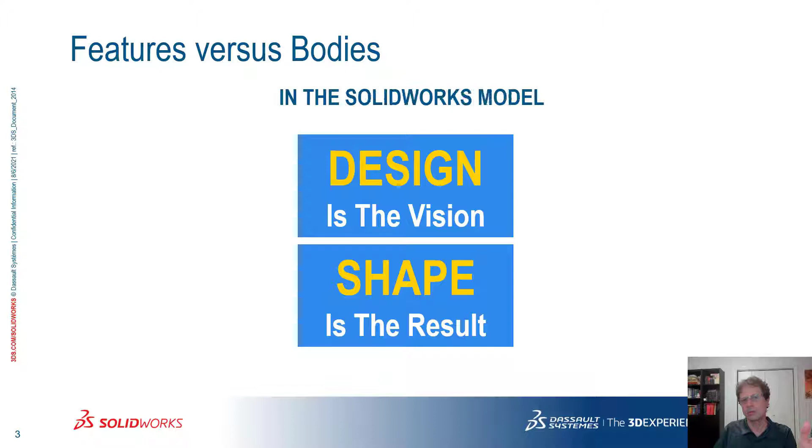So, features versus bodies. At one of the past SolidWorks Worlds, I attended a presentation by Monica Menghini from SolidWorks, and she said that in the age of experience, design is the vision and shape is the result. The following day, I was supposed to present something about multibodies, and I was thinking: what she said can be changed into - in a SolidWorks model, the feature is the vision, and the body is the result. So the feature is the information that you put in the model, and SolidWorks follows your instructions, your features, in order to create the bodies.

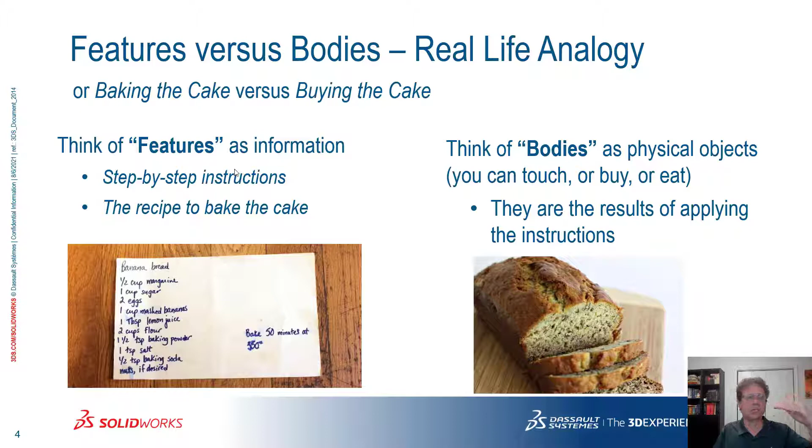Another way to look at this is thinking about baking a cake versus buying a cake. Features are pure information, right? They are the recipes - this is what you need to do in order to bake the cake. I'm not a baker, so I don't have recipes, I don't follow recipes. What I do is go to a shop, a bakery, and simply buy the cake. That's the body - I don't really care how it was created, I know it's yummy, and that's all that matters. So in the feature manager, features are just instructions, bodies are the geometry, the result.

Now, how can we use this in order to save time? Let's take a look at case study number 1. What I have here is a Lego piece, and my son wanted this other Lego piece.

If we are to 3D print this, I don't have a model for it, but I had a model for this one. So I asked him, what would you suggest me doing? How should I go from here to there? I don't have any features, any instructions, it's an imported body. He said, why don't we cut this, split it, and move it further out, and then just fill the gap inside.

Now it's time to divide and conquer. As you can see, I have only one solid body in this part. So I need to split this body in two and then move one of them into position. To split a body, I need a splitting tool, like a saw or a wire cutter. That can be done with a sketch, a surface, or a plane. Let's use a plane in this case.

The other thing you're going to see me doing is working as much as possible in the graphics area. I don't want to go to the feature manager. I don't want to go to the command manager.

I'm going to pre-select this face. I want a plane that's tangent to this face and also this face. I want the same plane to be perpendicular to this face. Notice I promoted the plane command to the context toolbar, so whenever I select faces, SolidWorks knows I might want to create a plane and gives me this option. The guess is almost right — I just need to flip the offset for the tangency. And with that, we got our plane.

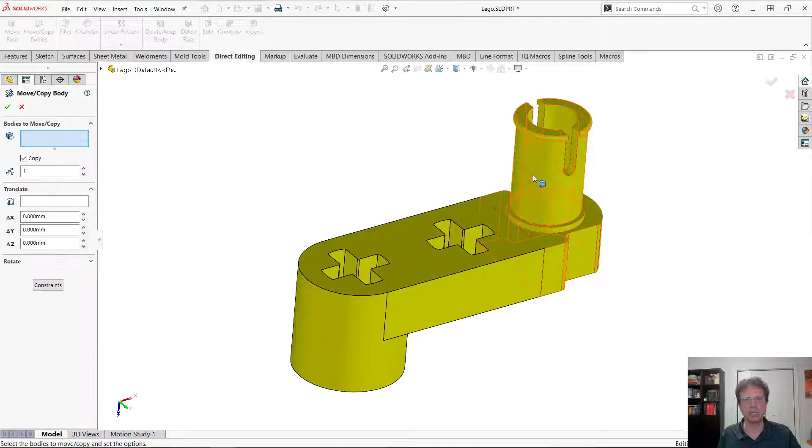Move body command. Move body has two flavors: translate and rotate, where you select the body and move it in the direction you want, or rotate it about a certain axis by a number of degrees, or constraints, which are very similar to mates in assemblies. So let's instruct this body where to be.

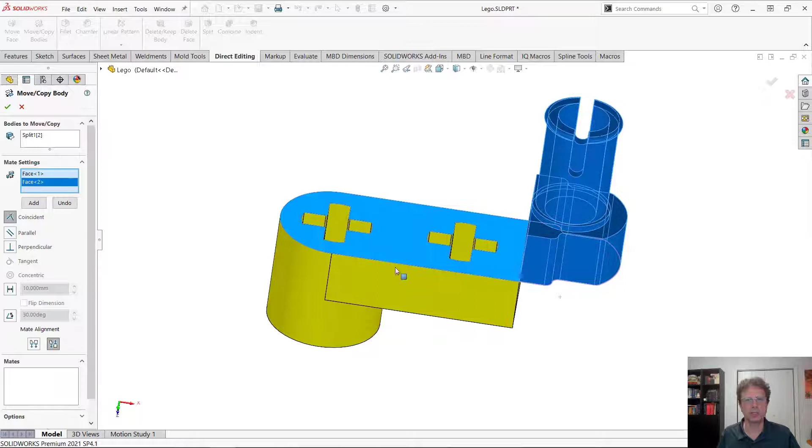I want this face to be coincident to this face, but I want them flush, so let's change the mate alignment and add this instruction. Notice I'm calling them instructions, not mates. Let's select this face and this one and apply a distance of 5 millimeters, then make these two faces flush, add this instruction, and finish the command.

So you can see right now where I am — we started in this position and now we are here. Just be aware there is a little bug in SolidWorks related to applying this type of distance mate in the body move copy command. If I do a force regeneration, which is Control Q, notice how this fails.

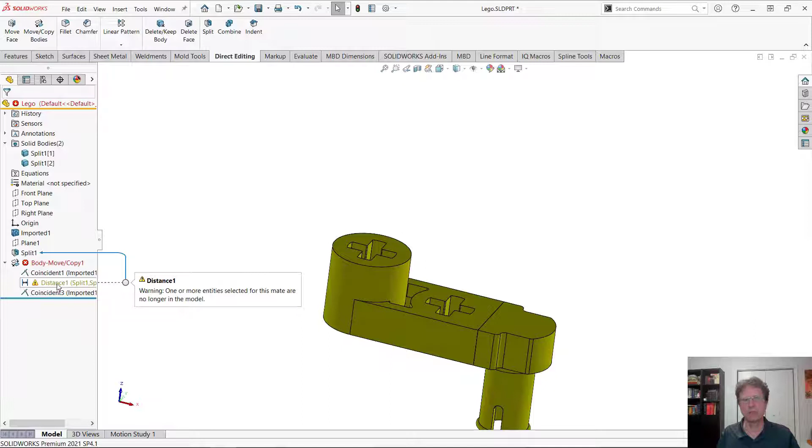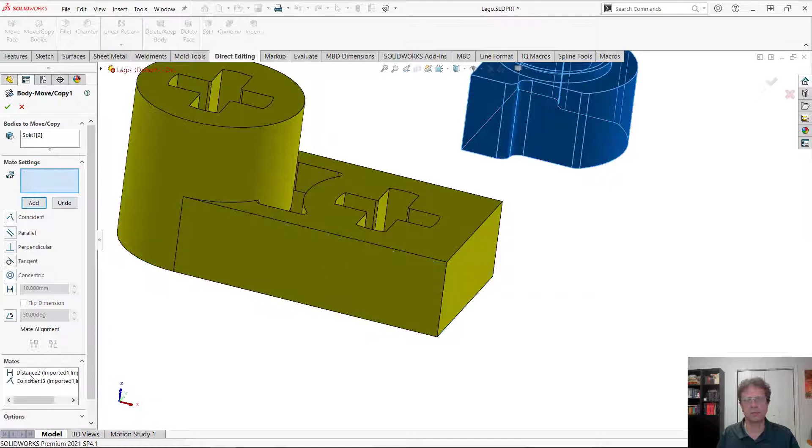Fortunately, there's a very simple fix — you simply need to edit that one more time. So what am I going to do to this distance? I'm simply going to delete it. Also, to make my selection easier, I'm going to change one of these coincidents to a distance. So for the time being, this is going to be a distance — that allows me to easier select these two faces. I'm going to go back to 5 millimeters and take the first distance and turn it to coincidence.

There you go, all the instructions were recreated. Let's do another force regen, Control Q. This doesn't fail anymore. This is a known problem.

I'm going to give you the SPR number if you would like to vote for fixing this sooner rather than later. Now let's copy this.

Remember, we need one more copy of this. Unfortunately, I cannot copy this body as long as I'm trying to apply constraints. So let's move to the other flavor of the move body command called translate or rotate. Now you can see I have an option here to make a copy of this body. If I just simply click OK, another body is going to be created on top of the other one.

But just to show you what happens, I'm going to move the copy out of the way so you can see the clone that got created by this.

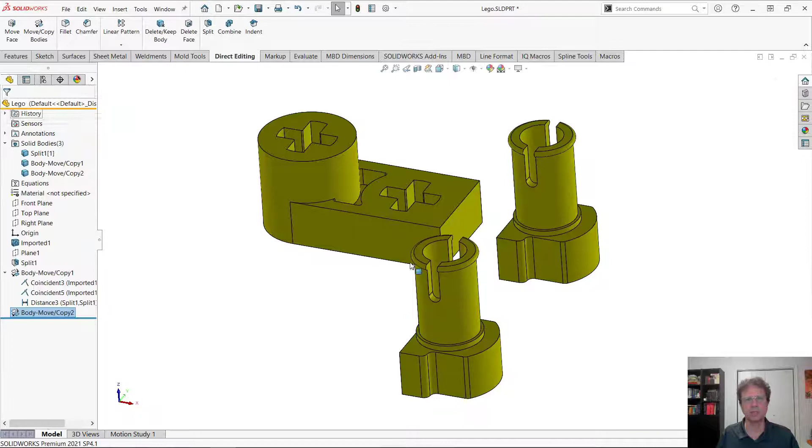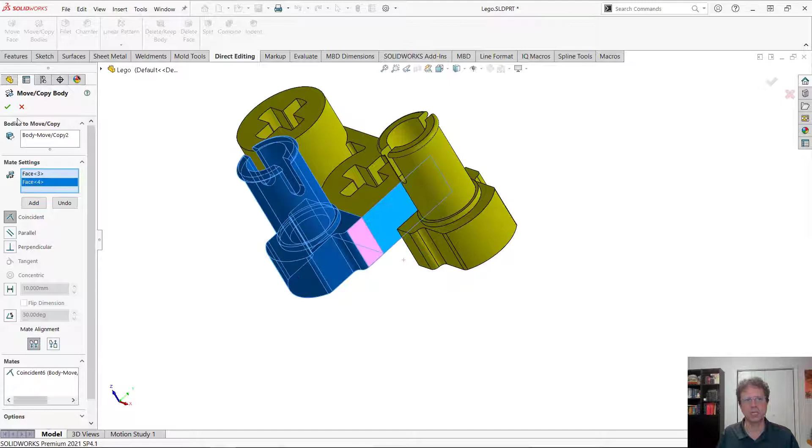And let's add one more command, one more move body feature. For that, I'm going to switch back to constraints. I'm going to get this body to have this face coincident to this face, and this face also flush with this face. So allow me to change the alignment and accept this new position.

Let's compare what we have on the screen with what my son wanted. It looks like we need to bridge this gap, right? He would like to have all this welded together. I have three bodies, as you can see here.

One thing I'm going to do, I'm going to create a sketch on this face. Notice that this face is already selected, so I can use the shortcut toolbar. I press the S key, convert entities. I'm getting my edges, press S again, and extrude. How far away should I go?

So let's take a look at some of the options. Probably a good one would be up to body or up to next. Let's go up to next.

Also very important is, do I want this new geometry to merge the existing geometry? Whatever gets touched gets merged into one body. You can see here the option to do that, merge result. Also, I can specify what exactly is going to be merged to the new body. So let's say everything is going to be merged to that new piece of geometry. And you can see I got the result I wanted.

Now, I don't know about your customers, but this particular customer is very demanding. He wanted now this piece. So the question is, how do I go from here to there? Well, there are a couple of things I can do.

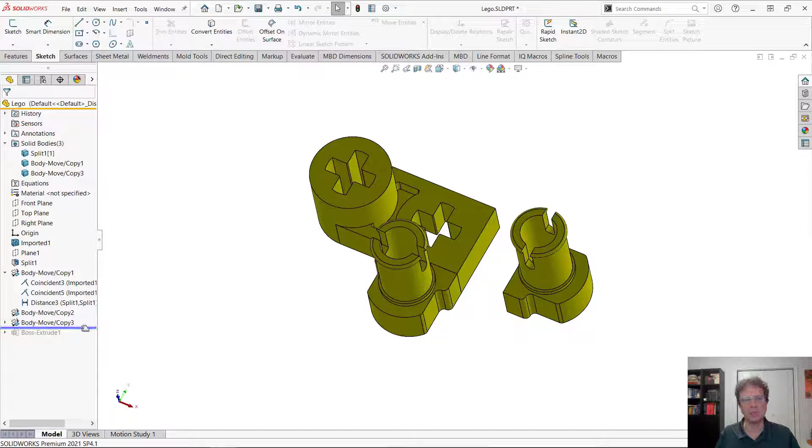I can go back in time before I bridge this gap and mirror this body to the other side. But one thing that would also be interesting to find out is, when I started with this, is this part symmetrical? I don't know if you ever tried, but we have a great tool here called Symmetry Check.

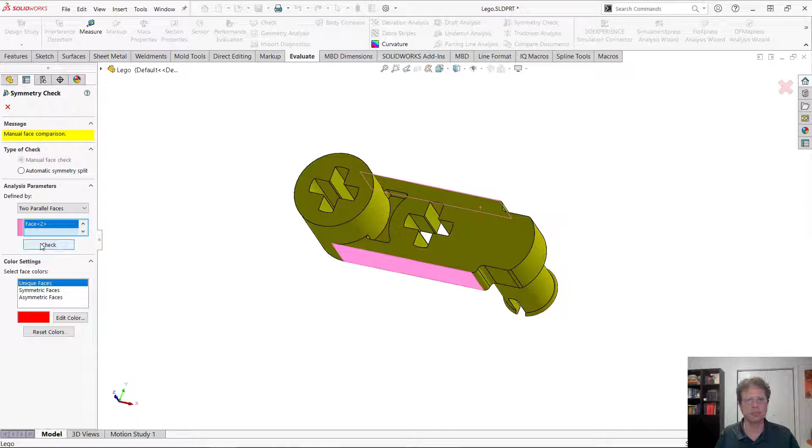So allow me to select this face and this face. It works to check if the entities on the part are symmetrical in regards to a plane that would be located in the middle of these two faces, kind of the symmetric position. And you can see I'm getting everything green, which means everything was symmetrical.

The other thing about the symmetry check is a plane actually gets created in this location. So now I know that if I come back to the present, I can simply take this plane and mirror the whole body, not the features, but the whole body about it, and then merge the new resulting solid with the old one. And you can see the job was done.

So just a couple of features and we are good to go. Let's take a look at the next case study.

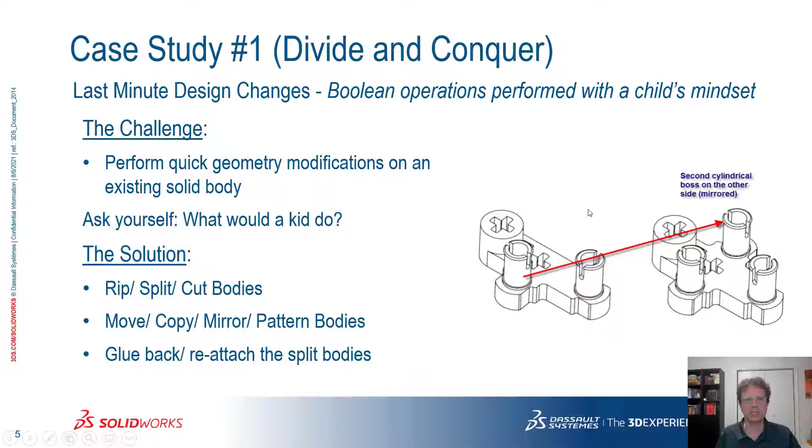Let's take a look at the second way of using multi-bodies to save the day. So I'm going to open up the next case study. I have here one body and I would like to apply a fillet. Let's see what fillets we can apply.

Let's start with the 1 millimeter fillet. Looks like it works fine. Let's try 2 millimeter. Works. 3, 4, 5. You can see how this geometry over here becomes harder and harder to compute by SolidWorks.

Let's go to 6 and no preview. So if I click OK right now, it cannot apply a 6 millimeter fillet. So what can we do? Always think about divide and conquer.

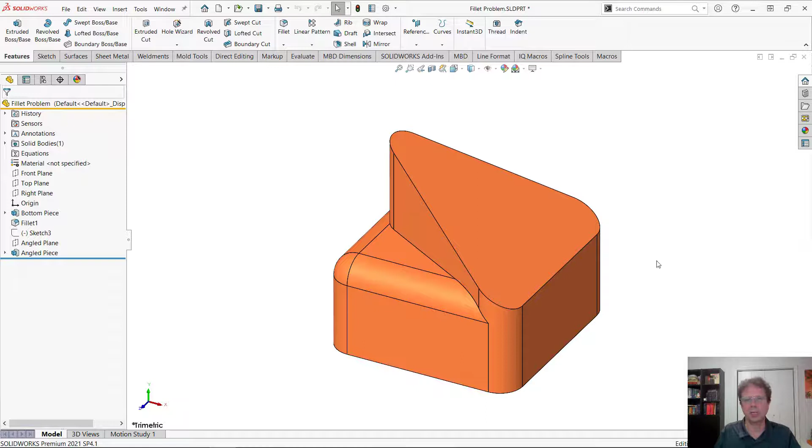Let's examine how this body was created. What instructions were used? Remember, features are pure instructions. Looks like we started with an extrusion.

We added a fillet on the top face. Then there was a line here that was used just as a reference for creating this plane. Now we have this plane, and the last feature is simply an extrusion up to that plane.

As you can see, the sketch is on the bottom, up to the plane. But remember from the previous example, we have an option to say create your own body, don't merge to the other one. So now I have two bodies, body 1 and body 2. I can hide one at a time.

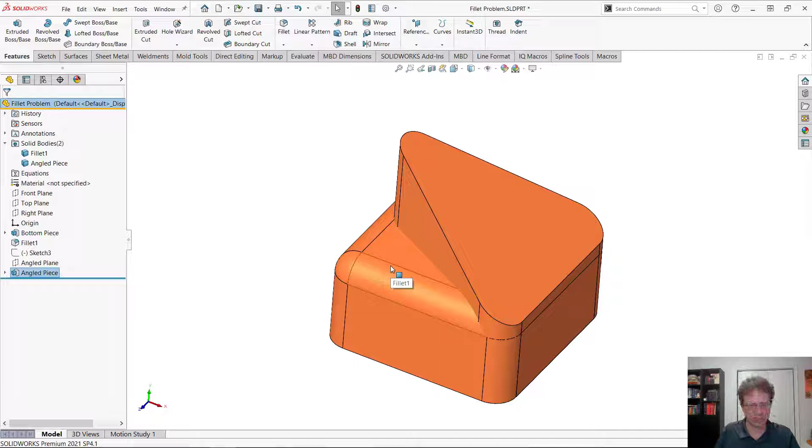A quick tip: if I want to hide one of the bodies, I simply move my mouse over it and press the Tab key. To bring it back, Shift-Tab. So notice Tab, this is clear, it's a body on its own.

I can very easily add a fillet, 6mm fillet, and it worked. Now let's bring the other one back with Shift-Tab, so now both of them are visible, but I would have to combine them together.

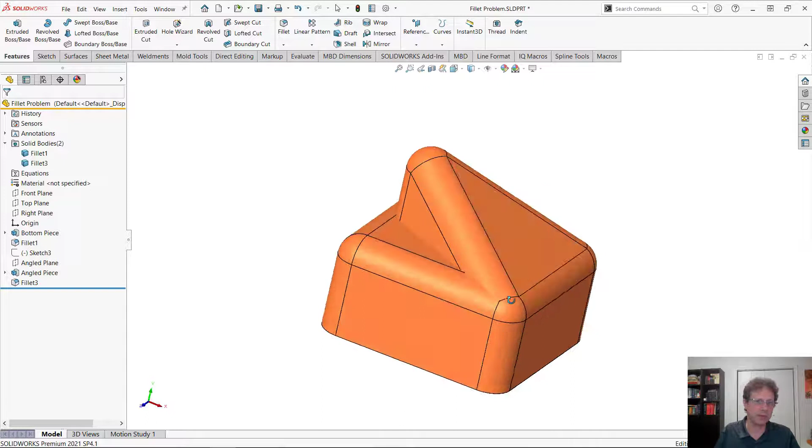Under direct editing, you have the Combine command. Use the option to Add, select the two bodies, add them, and now I have one body instead of two. And just to prove how amazing this is, I'm going to add a fillet here, same radius, and it worked fine.

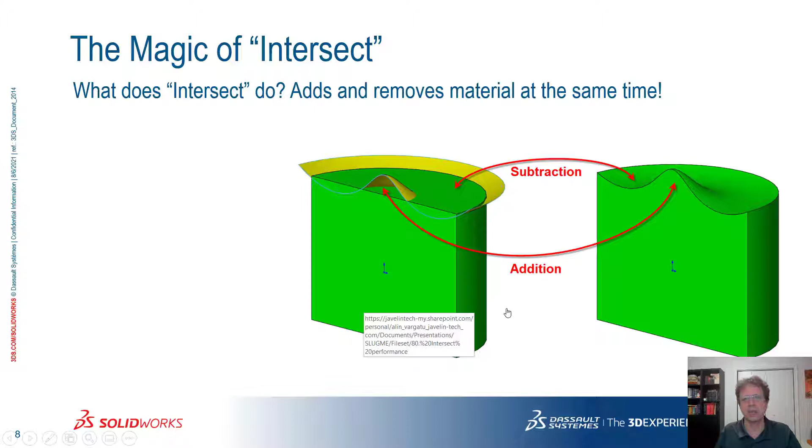Let's see how this works. Currently I have here a solid body, this cylinder, and I have this surface body. Looks like a sombrero hat, right? Notice they're independent of each other.

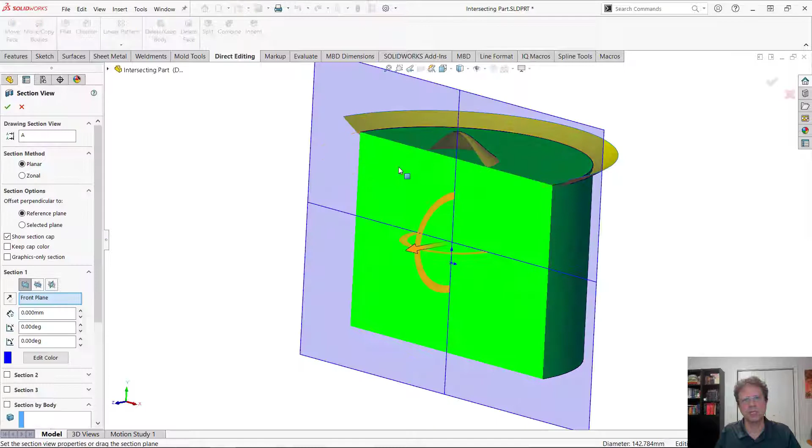What I would like to do is fill the space between this part of the sombrero hat and the cylinder, and also remove the space that is above the sombrero hat. So any geometry I want to be removed from there—the tool for that is going to be Intersect.

I'm going to select both entities. Intersect accepts surfaces, solid bodies, and planes. And it's looking for regions that are created by, and completely enclosed inside, the faces, planes, and surfaces that you selected.

You can see there are three regions: region 1, region 2, and region 3. If you want to remove one of them, or more than one, you can simply select it, and you can see it gets a check mark here. Also at the bottom of the property manager, I have the option to merge the result.

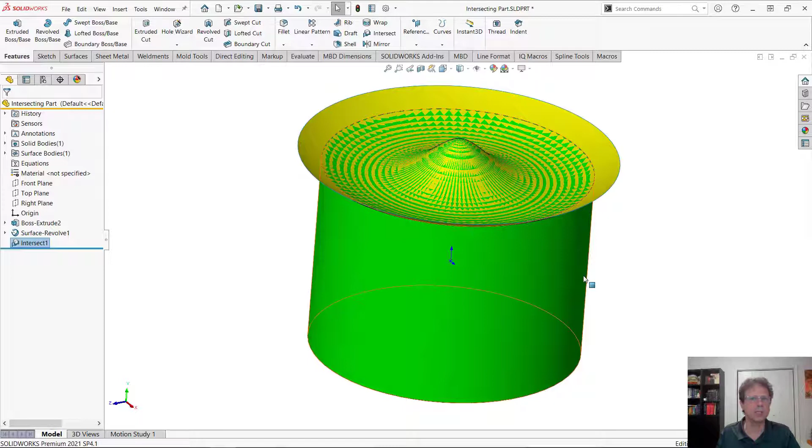So with one option, I can get the job done. I can do even more with one feature—I can remove the reference surface by using the option Consume Surfaces. You can see the end result is just a body.

Now, this is a simplistic way to use this tool. Let's see if we can find really good use cases for it.

Probably one of the best is simply making some money. For a bet, you can bet your colleagues who might not have attended this presentation, saying: can you create a solid body without a sketch in SolidWorks, starting from scratch? And if they say no, I'll bet you $1, or whatever currency you want to use, that it is possible.

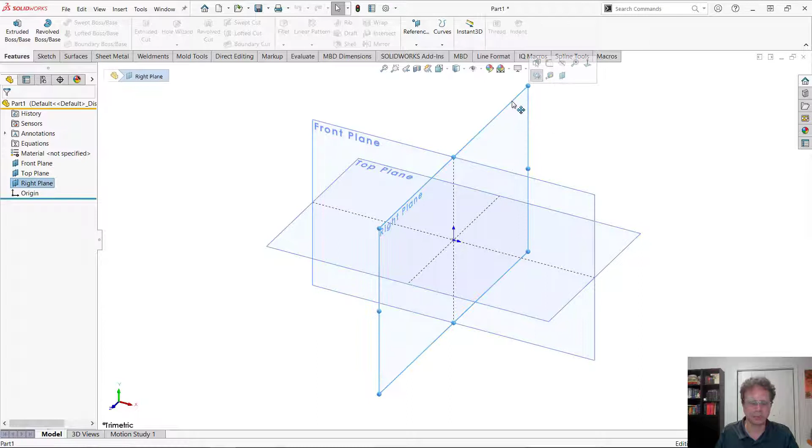So let's see how this works. Let's start with the simple part—I'm just going to make the major planes visible, and let me copy a couple of them. I'm going to use the offset command for the planes. One quick way to do that: you select a plane, hold Control, drag it, and you simply create another plane. Let's try to do the same thing for this guy—Control, drag it.

And the last one, Control, let's drag it down. So what I have right now is a space that's most likely completely enclosed by this plane. What's a quick way to select all the planes?

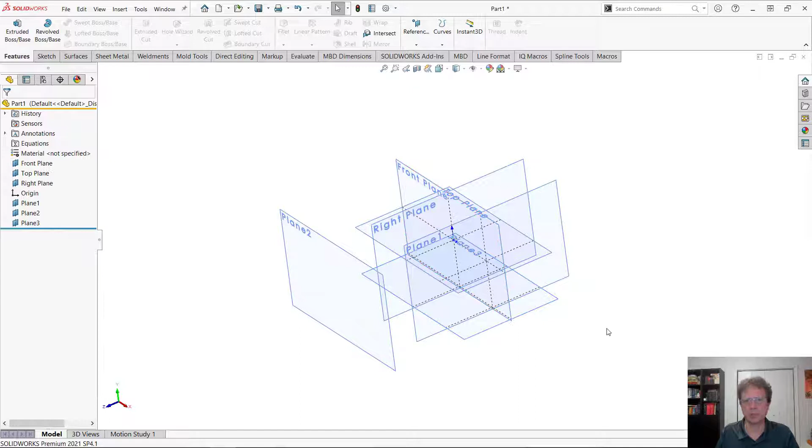You might wonder. It's the same thing that would happen if you hunt with a dog. I give the dog the scent and it's going to find the prey. In this case, I select the plane, press Ctrl A, and it selects all the other planes.

Okay, so let's run the intersect command with these planes, and you can see a solid body got created at the intersection of those planes. Now, this is a little bit of a gimmick. Let's go to much more serious stuff.

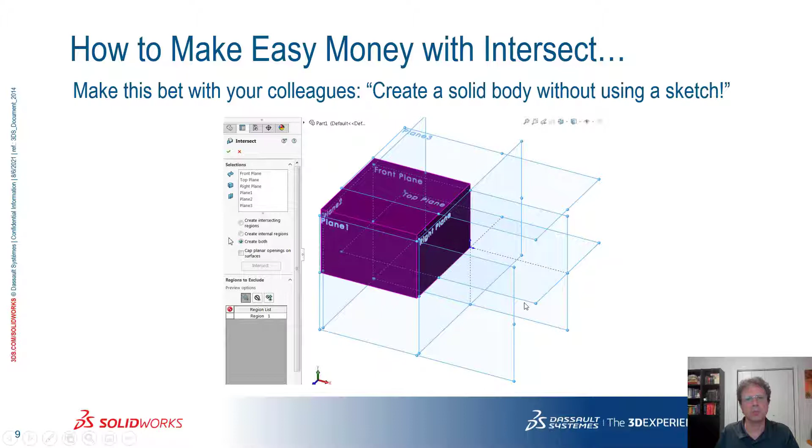A very common use case is you have something that should have a cavity, even though it has some openings to the outside, and you're wondering what's the volume of that cavity. You need to fill it, right? So let's give it a try.

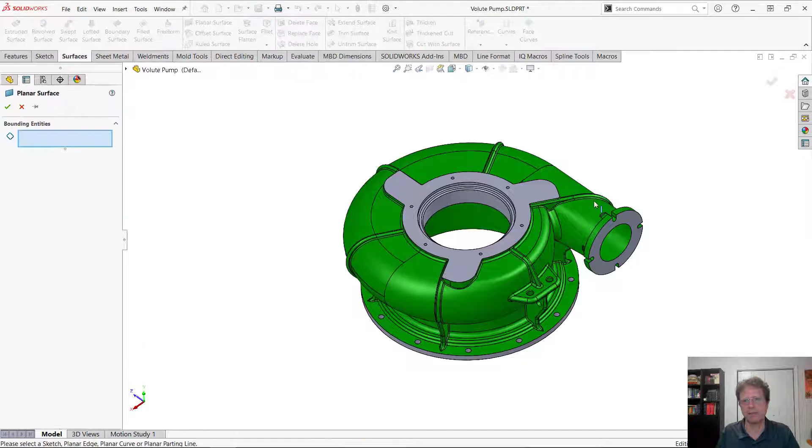I have here a volute pump, and the first thing I need in order to use intersect is to seal this gap. So we're going to create some lids. One great tool for that is the planar surface. If you have planar edges, you can actually select them.

Allow me to use the magnifying glass here. I'm going to press the G key to select this edge, and also over here to make sure I'm selecting the right edge. Right? So there you go. One feature created 3 surface bodies. So again, we're talking about bodies.

Now what I want is to create the volume that's completely enclosed in there. So let's run the intersect command. This time I'm going to ask it to create internal regions. So I'm going to select everything and simply fill the volume inside, fill the cavity with something. Let's see what we get.

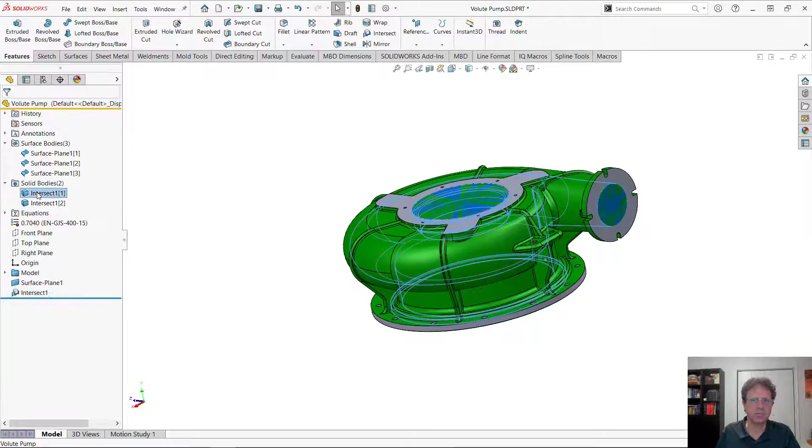You can see the volume got created. A new body gets created. So if I go into the solid bodies, I can see, okay, that's the one. Let's isolate it so we can see just this specific body.

And even more, let's give it a certain material. What would we like to do here? By the way, in SolidWorks 2021, you can even search for a material. I'm going to search for water, and apply it to this body. So now if I want to calculate what is the mass, what is the volume, no problem, it works fine.

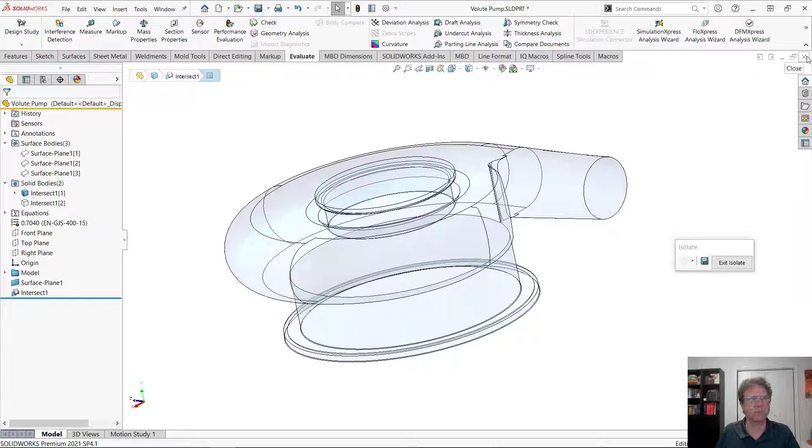Okay, so you can see the wonders of the intersect command. Next example,

intersect versus combine. So what I have here, I want to create a knife with no cutouts. I don't want to use a cut feature, extrude cut. I don't want to use extrude revolve cuts. I don't want to do anything. I simply want to take existing bodies and use them to modify other bodies.

When I finish with it, the part is going to look like this. It's a multi-body part. Right, so you can see here I have the blade. I have, for each, the handle is in two halves, and I have 3 pins. One thing that's important about the pins is to be shaped in such a way that they match the complex shape of the handle.

Now, in the past, I did that with combine commands, and you can see it's pretty complicated. Allow me to suppress all this, and let's do it again.

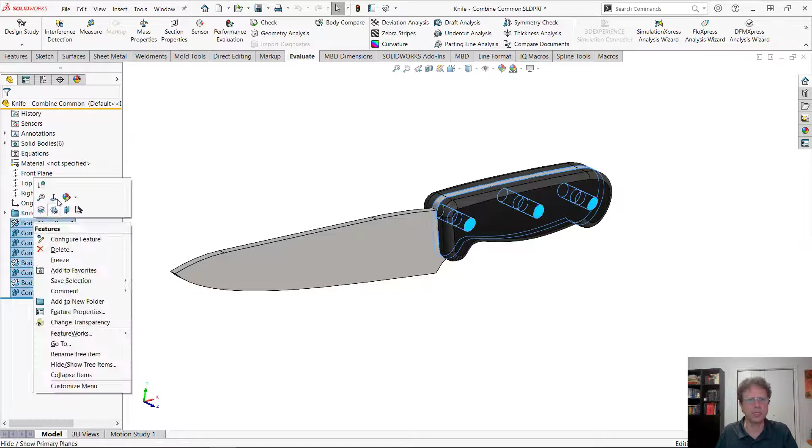Let me isolate them one at a time. So you can notice this is the blade, this is the handle, and it doesn't have holes. It's one body, and these are pure cylinders.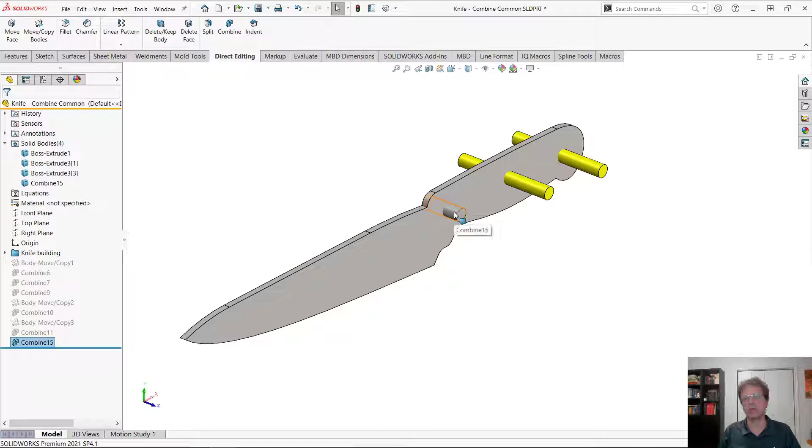Let's start with shaping the pins. So you might think maybe you can run combine using the common option. Select the handle, select one of the pins, and you can see how SolidWorks maintains only the volume that was common. This way you get the end faces to be the shape that you want.

The problem with this is that both bodies get consumed by the combine common operation, so that would not be acceptable yet. What we need to do is to clone the handle 3 times.

So let's go to the copy bodies command, increase the number of copies to 3, select the handle, and click OK. So right now I have 3 clones of the handle.

Let's run the combine command, this time with common, select also the pin, and let's click OK. See what happens. You can see how one of the copies of the handle gets consumed along with the old pin, and I'm getting the shape that I wanted.

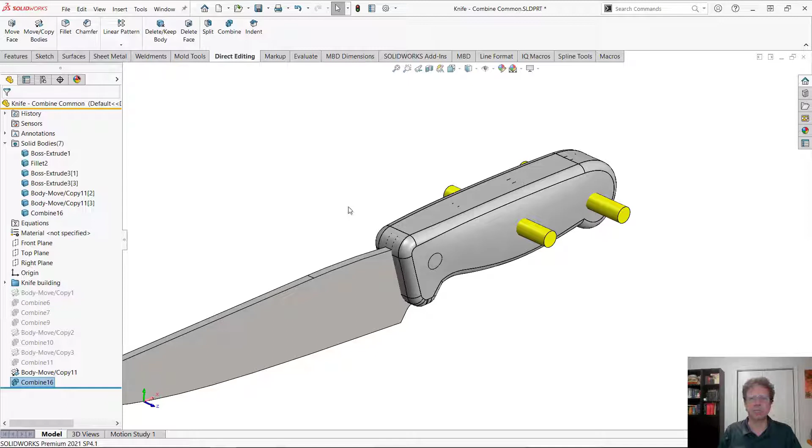Let's do it again. Common between this and this. Let's see if I press enter, what happens. You can see how the enter repeats the last command, so that's going to save me time, right? And the job is done.

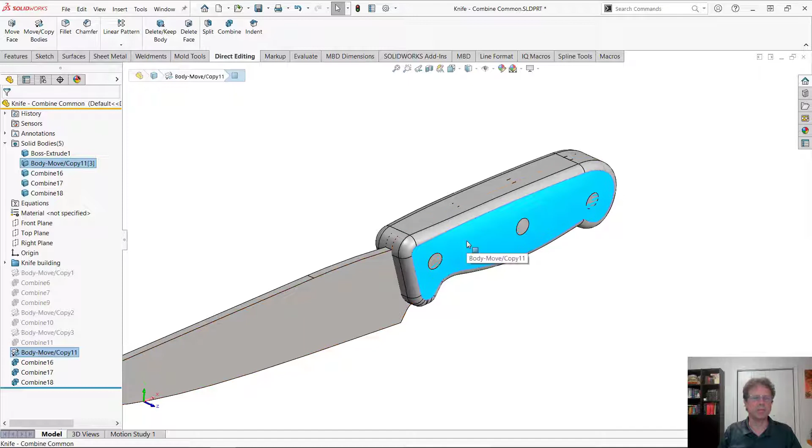We have the handle, and we have 3 pins. Now I would like to remove the 3 pins and the blade from the handle. So similar to what we did before, we need to make a copy, not of the handle, but of the 3 pins and of the blade.

So now I can run a combine subtract. I can subtract from the handle the copy of the blades and of the pins. And you can see how this is going to split this into parts, and SolidWorks even asked me which one I want to keep. I want to keep both. If I'm isolating these two handles, you can see that they are done. I don't need them anymore. We're good to go, let's hide them.

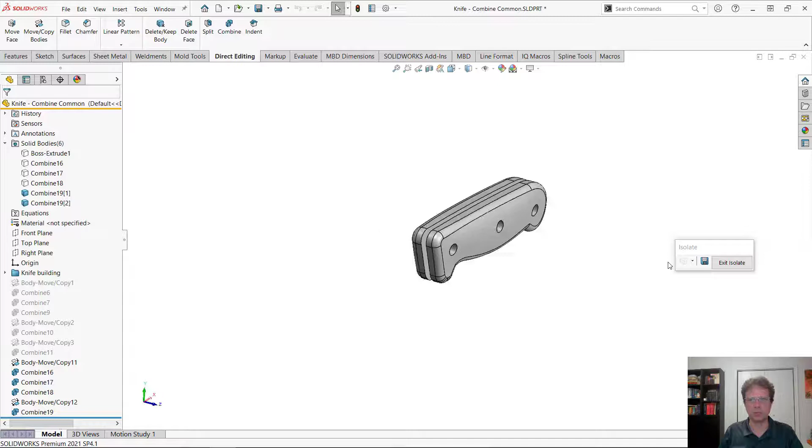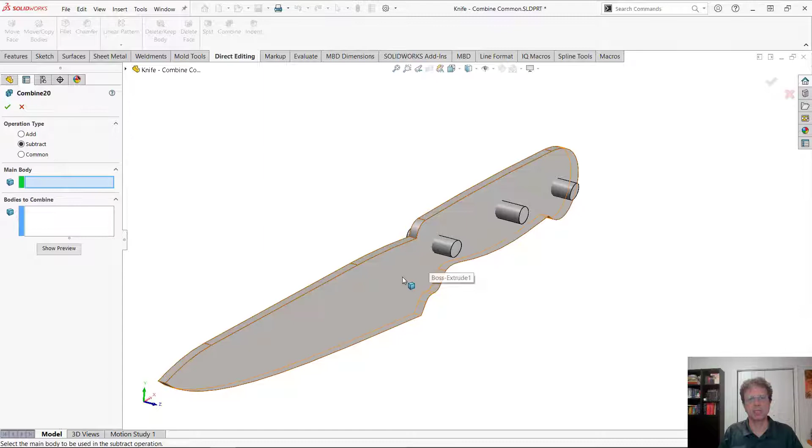Because we need to do one more thing. We need to subtract these pins from the blade. So again, I need a copy of them, so let's run the copy command. Make a copy of these three pins, and subtract these three copies from the blade. One, two, three.

Now we're good. Let's bring back the handle, Shift Tab, and you can see if I'm isolating the blade, it works fine. If I'm isolating the pins, they have the shape that you want. And with the handle, we already know. The problem with this, it was a very cumbersome process. I'm pretty sure many of you fell asleep just by watching me doing it.

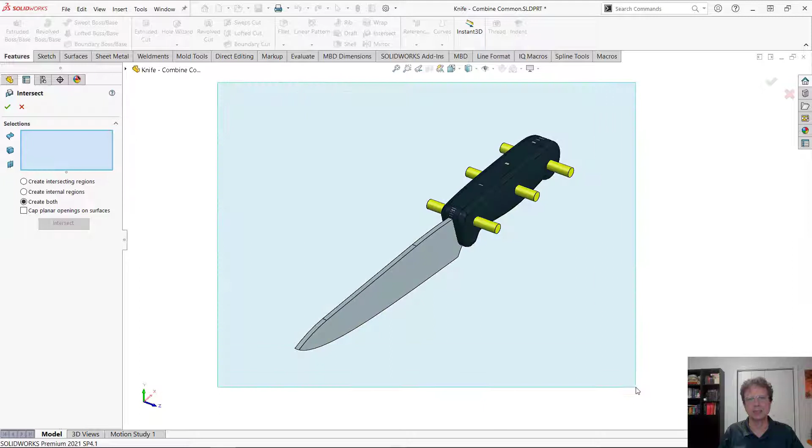So allow me to delete all these extra features, and let's see if Intersect can do the trick for us. So I'm going to run the Intersect tool, select everything, and ask SolidWorks to intersect them.

Now, what exactly do I want? I would like to remove these areas, these regions. And everything else I don't want to be merged, I want them kept as separate bodies.

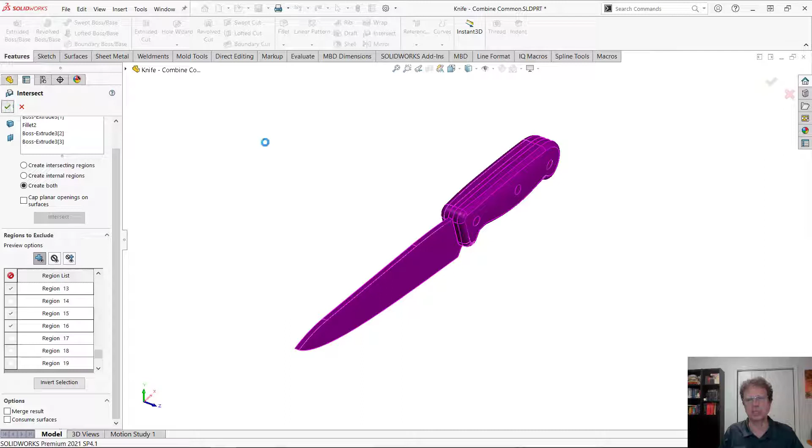Okay, now if I'm looking at the two handles, let's isolate them. They look fine, the job is done for the handle. Let me hide them, tab and tab.

The blade is actually made in two pieces, so we need to either run combine add, or if you want, you can even run intersect between these two. And you can see here at the bottom the option to merge the result, so this turns into one piece for the blade.

Let me hide the blade now, and you can see how each pin is made out of three pieces. So if you want to run combine, you need three combine features. Let's see what intersect can do with these nine bodies.

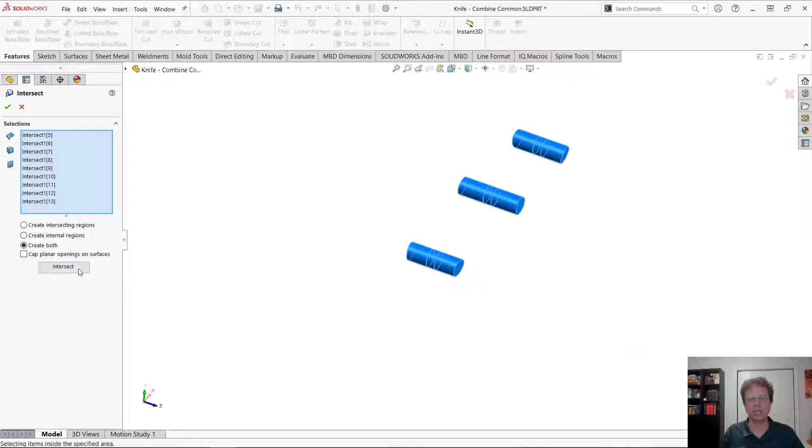So one thing it can do, it can recognize them as separate regions, but also it's giving you the option to merge everything that is possible to be merged. And you can see how in three features I was able to get the pins, the two handles, and the blade. So intersect saves us a lot of time.

Let's take a look at the next example. In this case, we will use multi-body techniques to reverse engineer the shape of a model. This came from a real life case study. I helped a client of mine who has a 3D printing shop. He received a model of a very complex camera from one of his customers. Unfortunately, I cannot share that with you, so I created my own model.

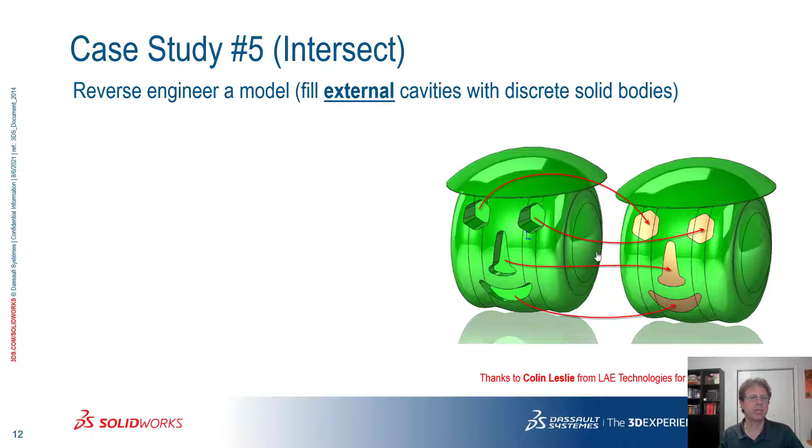He 3D printed that camera and it came up with a number of cavities. His customer told him he actually wanted these cavities to be filled in such a way that the outside is flush with everything around, just using a different material because that's where he's going to have the lenses. So the question is, how can we reverse engineer something like that?

Let's see, let's open the example. You can see it has these cavities. So the first thing I'm going to do is make a copy of this body like we did before. So let's make a copy of it, and let's hide the original. I'm going to go here, hide the original body. I have just now a copy.

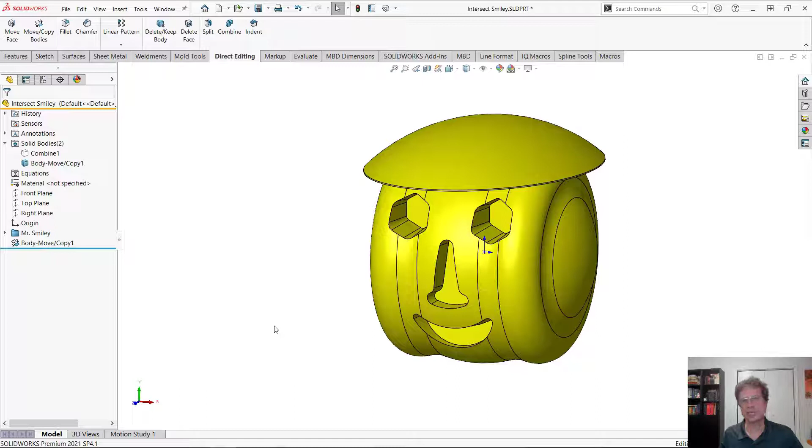What I want to do is get SolidWorks to remove all these cavities and revert to the original shape. And fortunately, that is possible using one of the direct editing tools called Delete Face. Delete Face has three flavors, the one I'm going to use is called Delete and Patch.

And you can save a lot of time selecting the faces you want to delete by simply selecting one and then using the context toolbar to select, in this case, all surrounded faces. You can see I can go click, and I'm selecting tens of faces with just a couple of clicks.

What Delete and Patch does is not just removing these faces, but also healing their neighbors, the surfaces around, back to their original shape. Let's see the result, and you can see it worked fine.

Let's bring back the original body, and you can see I have 2 bodies, one on top of each other. You probably can guess what I'm going to do next. I'm going to run the intersect command between these 2 bodies, and I'm going to ask SolidWorks to not merge the results, so now every region is going to create its own body.

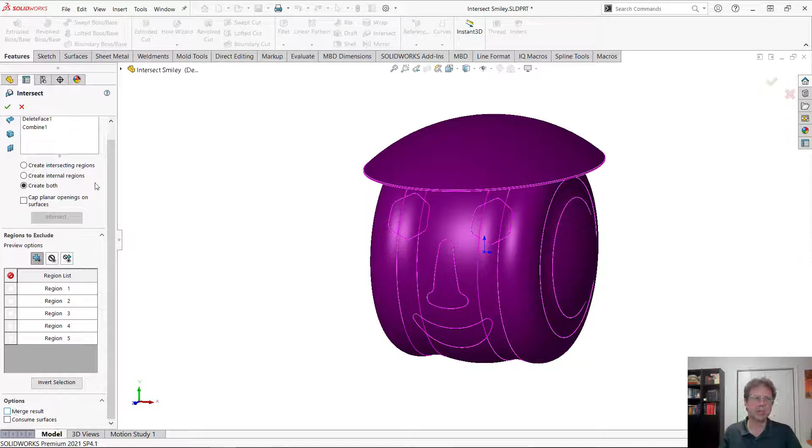You can see this is the original, allow me to isolate it. Now let's go and hide it, and you can see I'm getting the lenses. Just apply a different material and the job is done. So a nice way to save the day.

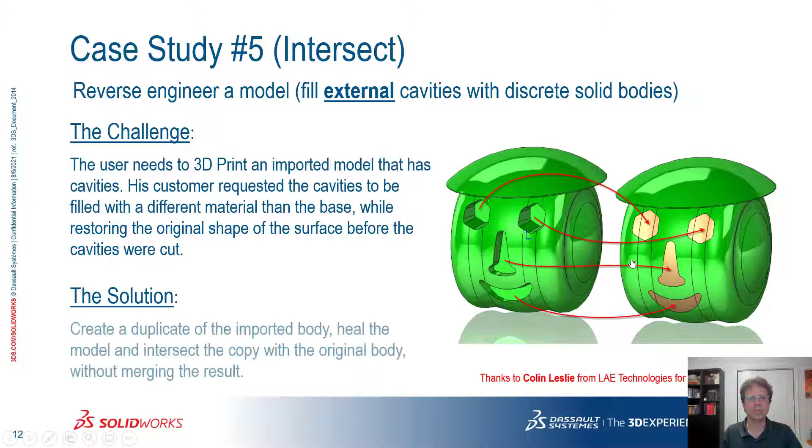With this Intersect, we already know it's very easy to fill a bottle. We just need the plane for that. So let me take the top plane and do an offset. Remember, control drag does that. Let's start with maybe 2 inches.

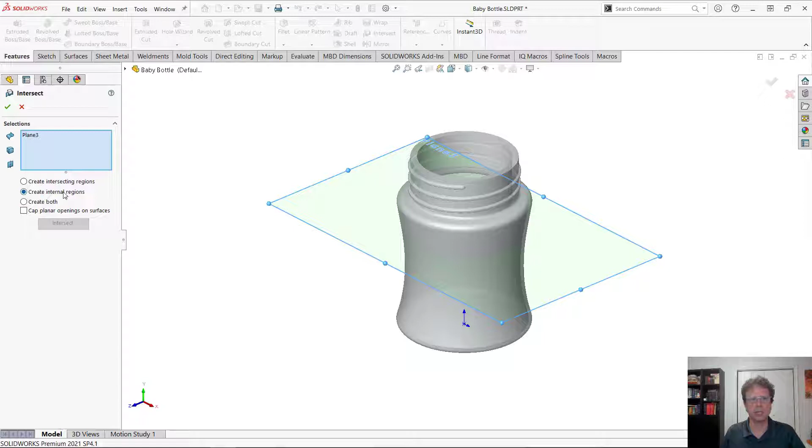And ask SolidWorks to fill this bottle up to this plane. So again, intersect, use the option to create internal regions. I don't want to split the bottle, I just want to fill the bottle. Intersect, and you can see that has been filled. Allow me to hide the bottle for a moment, and you can see right now I have the volume of milk. How do I measure it?

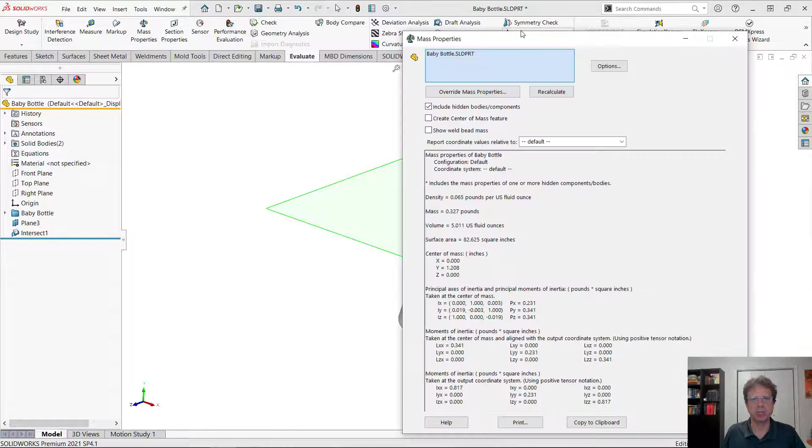So there are a couple of ways to do that. One is with the mass properties. Just make sure that instead of selecting the whole part, you select the actual body that you want to measure. You can see right now the volume is about 3.8 ounces, and I want exactly 3 ounces. Of course, I can double click on the plane, pick up this dimension, adjust it, measure again, and keep repeating all that work. That's very, very time consuming.

Even better, I can get the volume reported as a sensor. So I can go to the sensor, and let's add one related to the volume of this body. You can see right now, if you go here, the volume is 3.818. So now it's just a matter of varying this dimension and rebuilding to read the volume.

Fortunately, there is an even faster way to do that. I can simply add a design study. If you have SolidWorks Simulation Professional, you can even use the optimization option to find the actual result. If not, you don't use the optimization. So let's try with optimization first. I'm going to add this dimension as a parameter, let's call it level, the level of liquid.

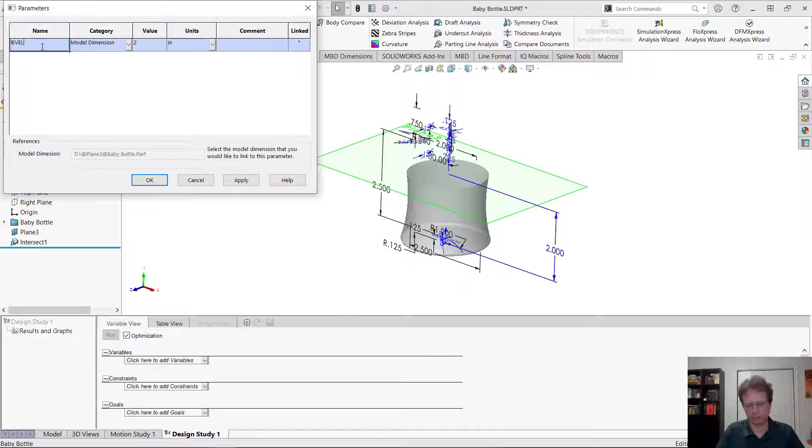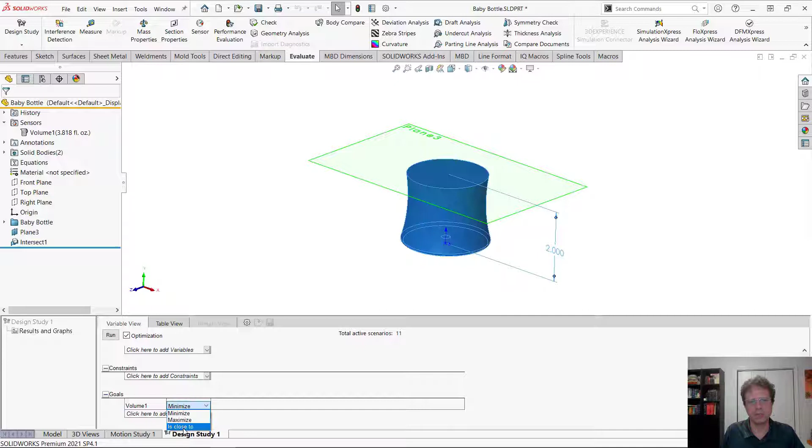And let's make sure that we specify some ranges. We know 2 inches is too much, so why don't we go between 1 and 2 inches? Let's use the option ranges with step, so a step of 0.1 inch. Now, what is the goal? The goal is for the volume to be exactly, or as close to 3 ounces as possible.

And now let's run, and you can see how SolidWorks is simply changing that dimension and measuring the volume. The beauty of using optimization is it's automatically selecting what is optimal. So now if I want, I can further refine this. I can go to the variable view and say, you know, looks like 1.6 is a bit too much. Why don't we go between 1.5 and 1.6 with a step of 0.01.

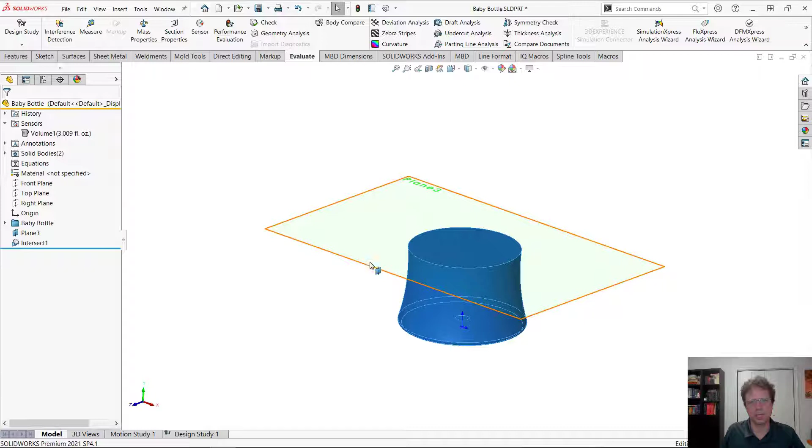Let's run this again, and hopefully it's gonna find something that's even closer to 3 ounces. Looks like at 1.59 I'm getting exactly, I'm inside 2 decimal points. If I select this and go back to the model, this is actually the value that is gonna be preserved.

Now, what if you don't have SolidWorks Simulation Professional? Well, in that case, you wouldn't be able to use optimization, so you need to take it out.

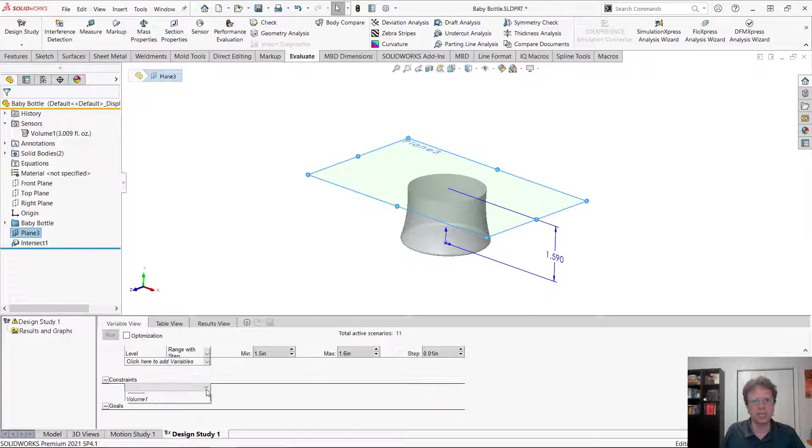You cannot use goals, so I'm going to have to delete this goal and turn off optimization. You can stay with the range with step, 1.5 to 1.6 in this case, and add the volume as a constraint. So the only thing you can say here is just monitor it.

Give me a list of what's going on there. So very similar, SolidWorks is going to go through all these scenarios. It's not going to pick the optimal one for you. You're going to have to visually take a look at which one is closest to what you need. It looks like it's 1.59. Select the scenario, this is the value that's going to be listed in there. So it's a nice way to save a lot of time by having SolidWorks do the iterative work for you.

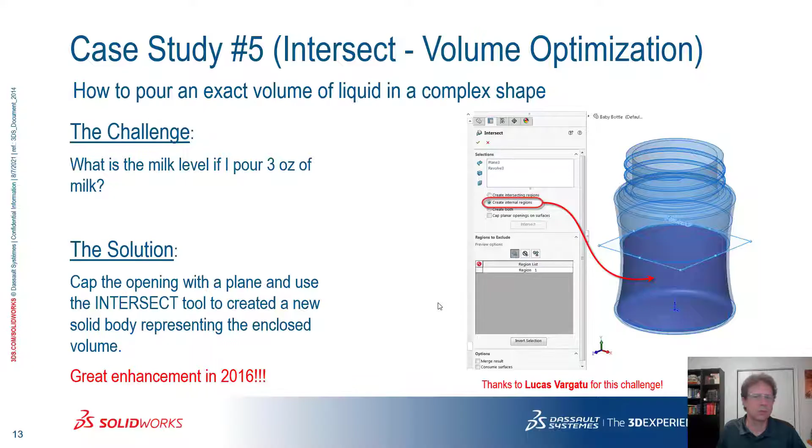So far we ran the Intersect tool inside parts. What about assemblies? In this case, I have an intake manifold, and I'm curious how much gas, how much air it contains. Let's find out.

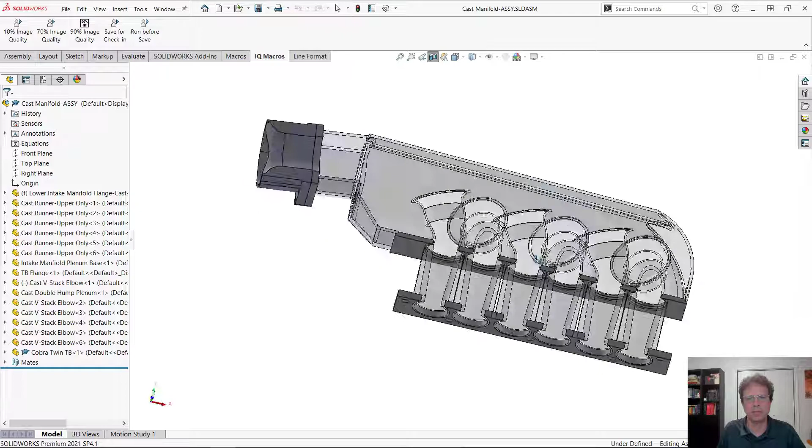This is the assembly. If I do a section view through it, you can see there are cavities, areas that communicate through the manifold. Also I have quite a few parts. If I'm checking the performance evaluation, I can see that altogether there are 17 components. I cannot run intersect inside an assembly.

So what I need to do is to model the gas as a part. Let's try that. I'm going to insert a brand new part, and simply click on the empty space in the graphic area. That ensures the new part I created is placed in the origin of the assembly. Notice the origin of this new part and the origin of the assembly are the same, their planes like front plane, right plane, top plane are going to be one on top of each other. Also, the new part is fixed.

Allow me to rename it, I'm going to call it gas. Notice this is a virtual part, it's between brackets, so it doesn't yet have its own file. Maybe I don't even need a file, I just want this air or gas volume to be inside the assembly.

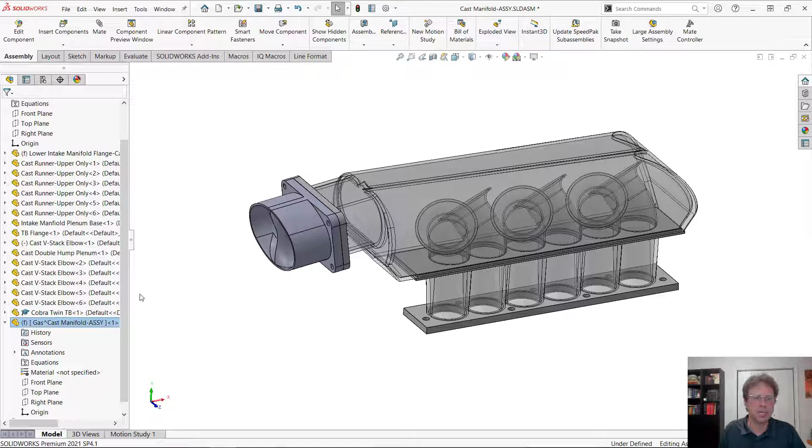Let's edit this part. Right now it's empty, right? If I open this part in its own window, you can see there is nothing inside it, absolutely empty. Let's switch back to the assembly.

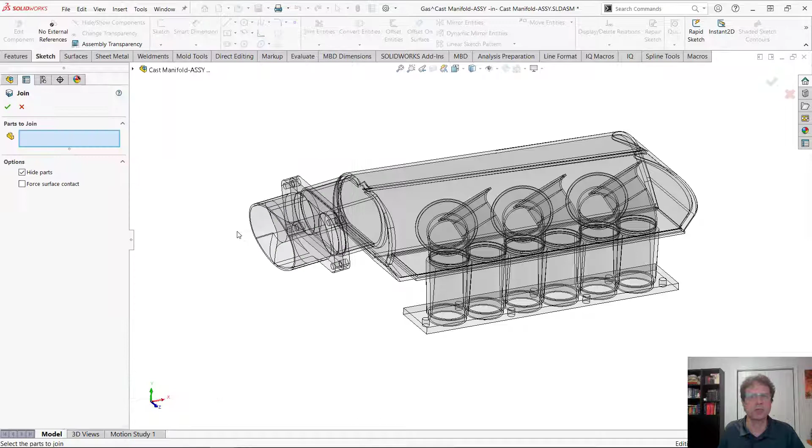I'm in editing mode. One thing I'd like to do is copy all the bodies of the assembly inside this part. That can be done with a feature available only when you edit a part inside the assembly, called join. You can also search for it instead of going through the menus. So allow me to select everything. One interesting thing about the join command is it can even merge the bodies of the parts you selected together inside that new part I created. Let me click OK.

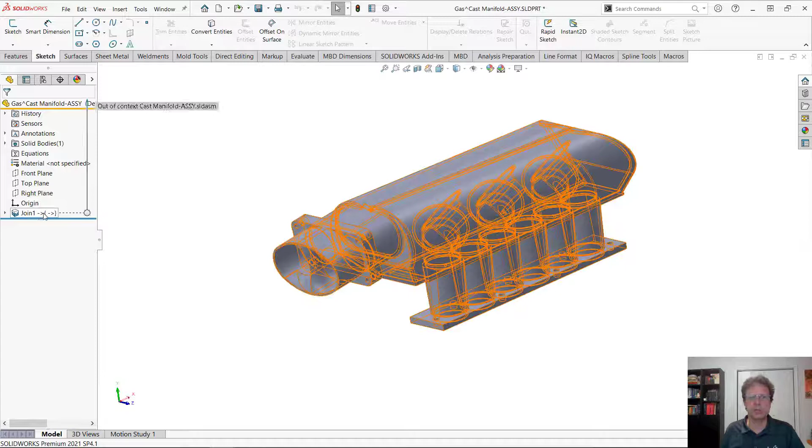Now let's see the result. If I open again the so-called gas part and do a rebuild, you can see how everything that was in the assembly, all the geometry, got copied in here. This also has another major advantage: if the parts inside the assembly change later on, this will update. You can see here it has external references.

So if I'm doing sections here, you can see again the cavities, nothing different than what I had before. What I actually want is the space inside the cavity to be represented as a model, not everything else. So let's prepare our model to accept the intersect tool.

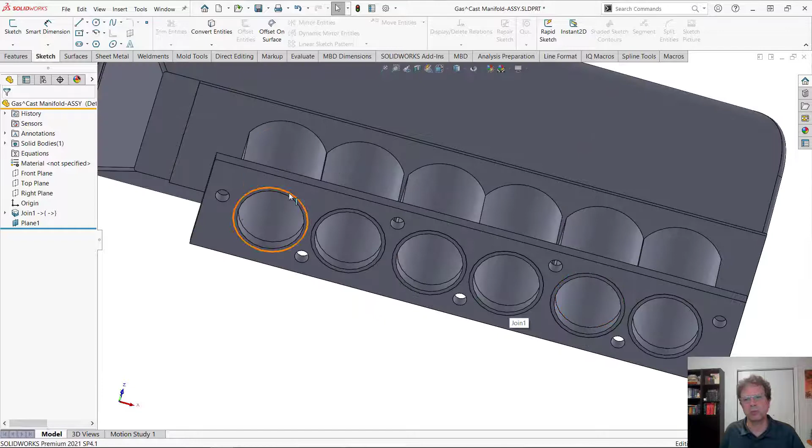Let's start with applying a plane here. Of course, I can use the planar surfaces like we did before, so let's simply put a 0 millimeter offset. I think we are in millimeter displacement. Let's apply another plane right at the bottom. Instead of applying multiple planar surfaces, I'm going to create another 0 millimeter offset plane from there. So there are two planes and one solid body.

Time to run the intersect command: plane 1, plane 2, solid body. This time I'm going to ask SolidWorks to create all the regions. I don't necessarily want just the inside because I want to automatically delete everything else. So which one do I need to keep? Notice I have altogether 8 different regions.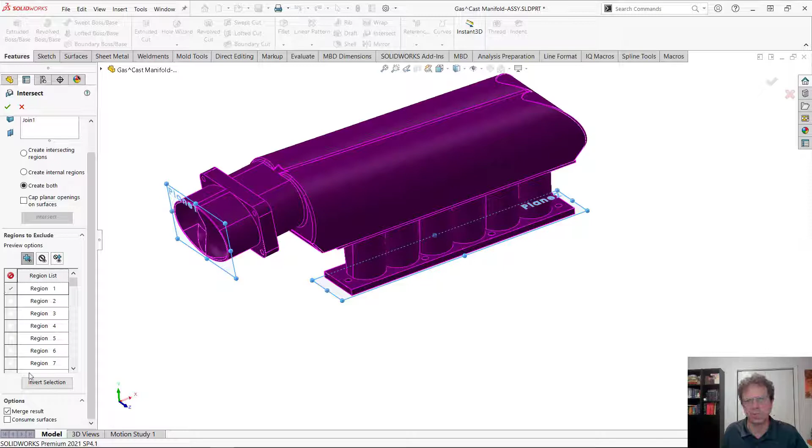Well, I know this is the one I want to keep, so allow me to click on it just to see which one is selected. It looks like it's region 1. Let's use the invert selection option to preserve this and get rid of everything else. So invert selection and simply click OK.

And you can see this is the volume that I require there. One thing that would probably be a good idea is to apply a material, so let's apply maybe air as the material.

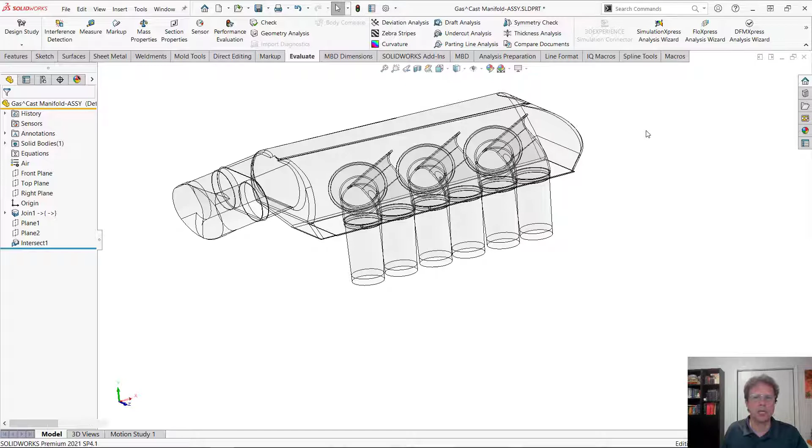At this point, we can identify the volume, we can identify the mass. So let's calculate that. 8.8 liters. If I switch back to the assembly, notice that the volume of gas is there. If I do a section view, and I click here, this belongs to the gas. So it worked fine.

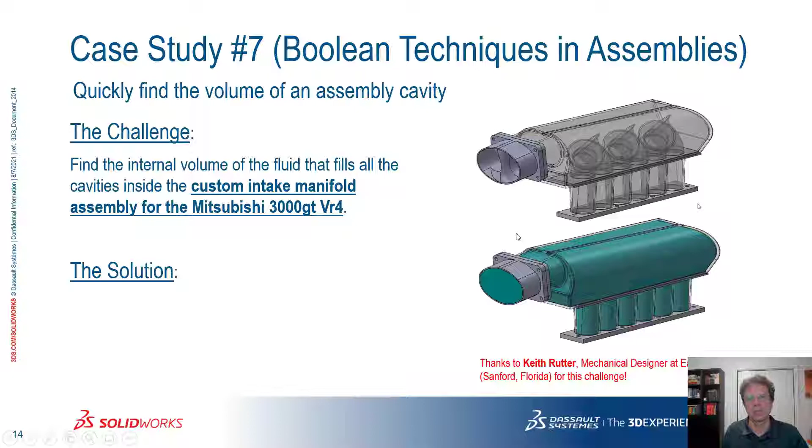The last case study is even more interesting because this time we will have an assembly with two parts, and we need to create a dampener between these two parts. Imagine these two are both metal and they are touching and they make a lot of noise. Let's open the assembly and take a look at it.

Part 1 is the yellow one. You can see how it looks. Part 2 is the red one. There is a problem though.

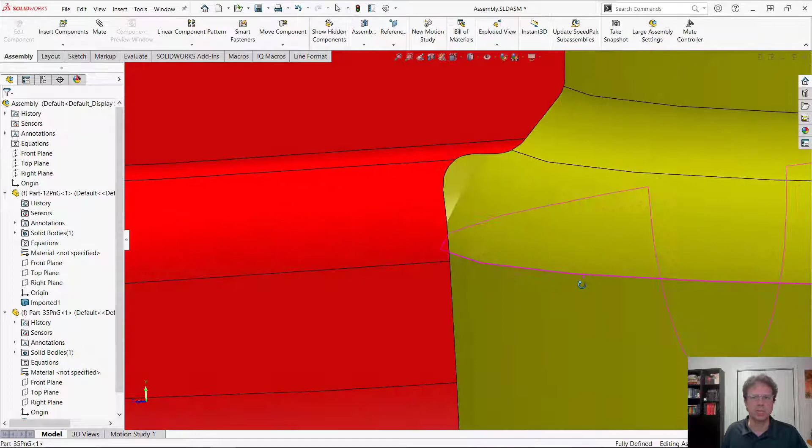If I try to use the same technique I used in the previous case study, notice there is an opening, a gap between the two parts. So you wouldn't be able to run intersect if you have this gap. The material is simply going to flow through there and go out. So the technique is going to be, again, divide and conquer in 2 steps.

Let's insert a new part in this assembly. That's going to be the dampener. Very similar to what we did before, insert a new part, and I'm going to put it in the origin of the assembly. Let's call this exactly that, dampener.

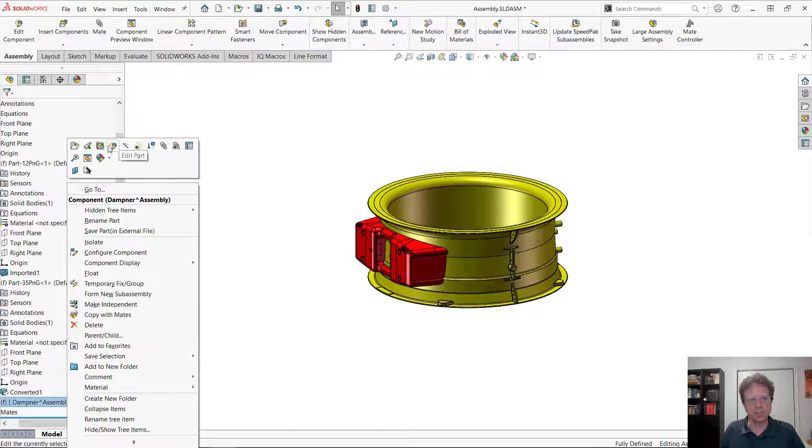Let's edit it directly in the context of the assembly. This time I'm going to copy only the body of the red part. Let's try the join command. This time I'm going to try to search for it. SolidWorks can find it, select it, and simply copy it inside the dampener.

Now if I open the dampener, you can see it contains this part. What we need to do is create some type of interference between this part and the yellow one. So I need to move some of these faces to create this interference, and I calculated that 4 mm is going to do the trick.

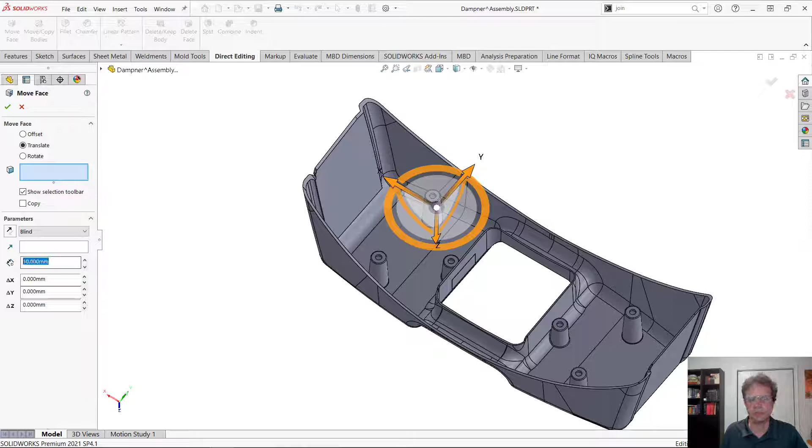Let's go to direct editing and run the move face command. I'm going to type 4 mm for the amount of translation that's going to happen. I'm going to say I need this face to move, and also all the faces tangent to this one, so you can see these are going to go. The question is what direction I'm going to use, so let me select this face to provide the normal to this face as the direction.

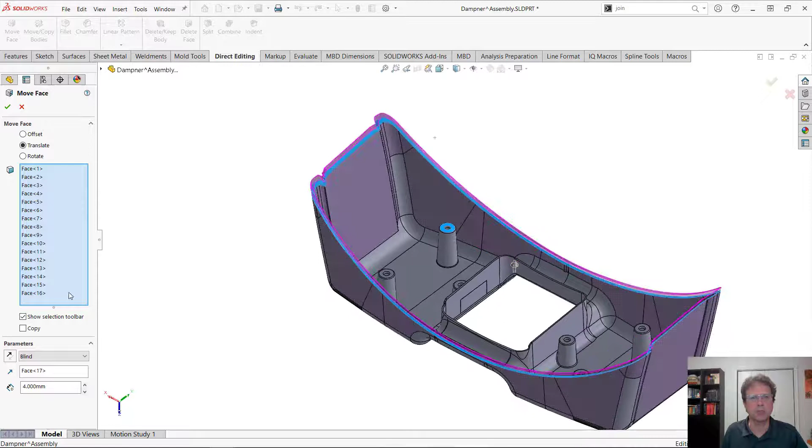Also, I need to go and add these faces, this one and also the ones tangent to this. You can see the result in the end. This is what it was before the move face command, and this is what's happening after the move face command.

Let's switch back to the assembly and examine what's going on in this area. Maybe I'll exit for a moment from the edit part command. So you can see I have interference between the dampener part and the yellow part.

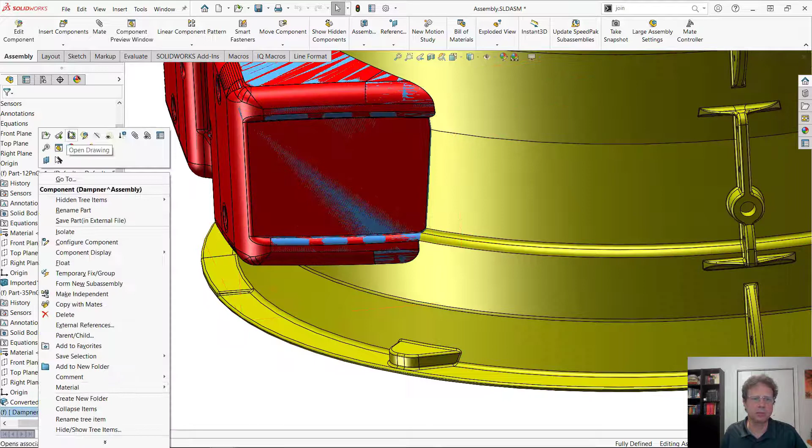Let's edit this dampener one more time, and let's add the body of the yellow part in here. So again, join, and click OK. You can use more than one join feature. Let's open the dampener, and you can see right now I have both of them actually fused together. It's only one body in there.

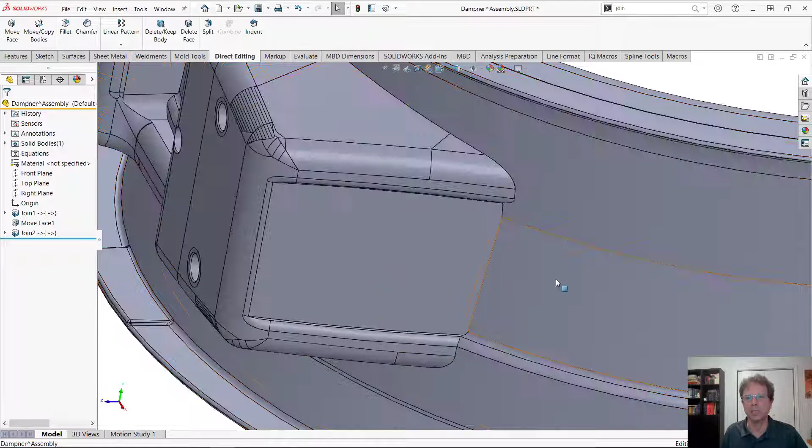But if I decide to do a section view, you can see that there is a gap. And actually this is the gap that I want to fill with a material like rubber, so it's going to dampen the vibration.

Unfortunately, if you try to run intersect with only one body, you're going to find out that's not possible. Intersect was originally considered to require at least 2 entities. So let's add a plane just to have it in here to get access to the intersect command. Run the intersect command, and SolidWorks is going to find all the regions located inside the various faces of that body, and obviously the top plane. Let's see what we're gonna find.

Right, there are quite a few regions here. There are 8 regions. Let's find out which one we actually need. So allow me to remove the one that's on the outside. Looks like we need this one. So looking at these regions, region 8 is selected. That was the outside.

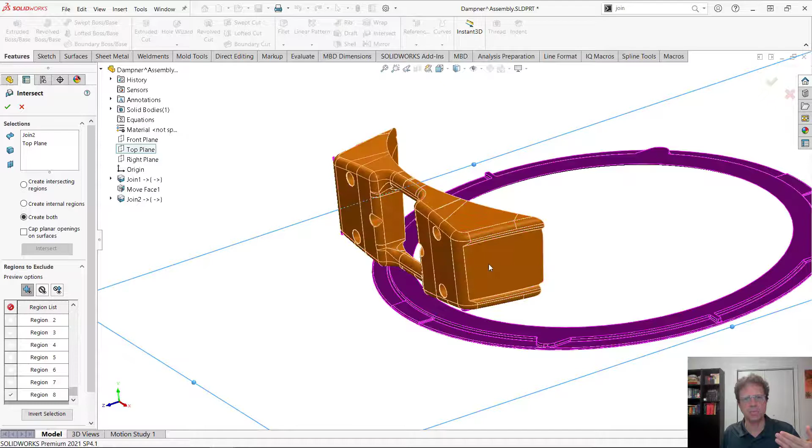Okay, let's see which one is this. I click on it. Looks like that was region 1.

So what I'm gonna do in SolidWorks now is press on this red forbidden sign. Notice the prompt, once I go over here it says select all. So I click on this, select all of them for removal. And then I'm gonna say, do not remove this one, region number 1. This is the one that's actually the dampener. I'm simply gonna click OK. Let's see the result.

Pretty complex operation, but SolidWorks will be able to complete it successfully.

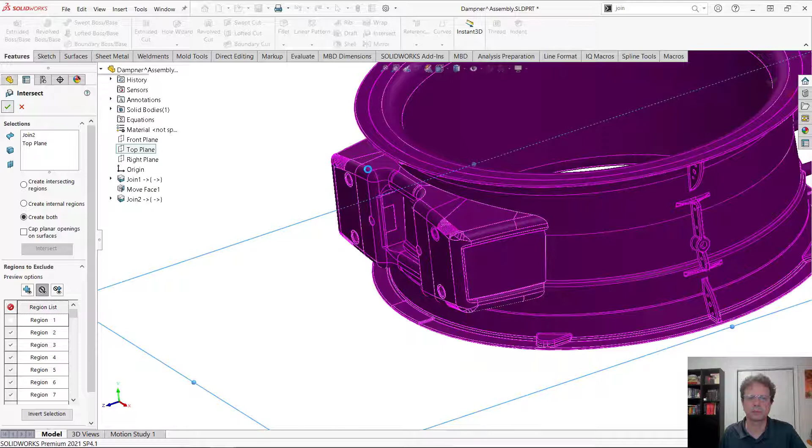And now it's just a matter of applying the material that you want. So let's say this material is gonna be rubber. Now we have the actual properties, we have the volume, we have the mass, we have everything we want.

And let's get back to the assembly. And let's hide for a second the red part. And you can see this is the rubber that fits perfectly between the two of them. Now most likely we're gonna need some type of scaling up for it to be just perfect.